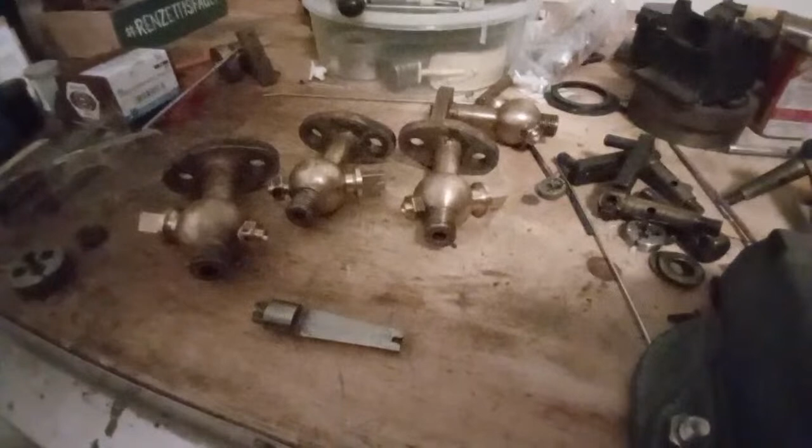We seem to have a bit of a situation here, that's where we're at. I've misplaced my 8-inch tablet, my Samsung Galaxy. I've got no idea where it is, and it's what I usually live stream on. So I'm reduced to my telephone, which is a bit muddy and a little bit ordinary. But we'll get by with it, and I'll have a bit more of a concerted look, and hopefully it turns up before next week.

It's a bit different. No idea where it is. It's one of life's mysteries. It's either in this room or the other room. I haven't taken it anywhere else. I haven't been anywhere else, really. I'm pretty sure it didn't go in the van anyway. I'm pretty sure that it's not in this room, so it must be in the other room, and I've had to turn that place upside down, literally. So I've slotted it in on a shelf somewhere. I've got no idea where. So sorry, guys, to put up with this.

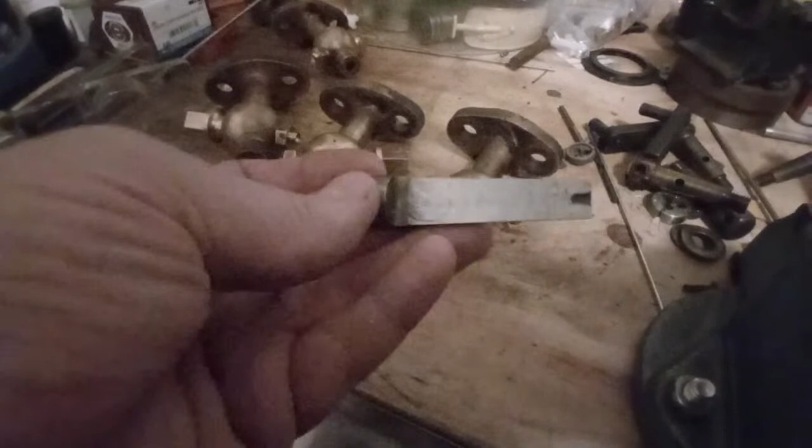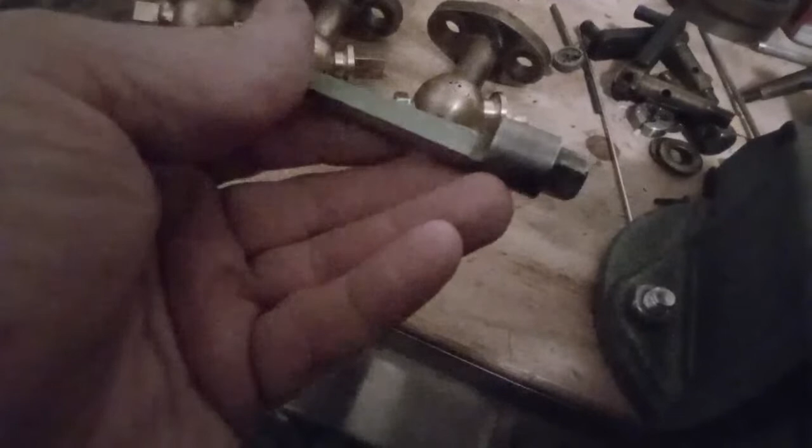I guess you would call it a D bit, but it's not even, because there's no clearance, no nothing on it. And I hoped it would scrape everything a little bit bigger diameter, and it probably will, but it needs some work yet. So it's just got a hexagon on that side for a socket, and it's hardened and tempered back to about 60 RC, something like that. So pretty happy with that.

Now, while Stephen Lang's here, Stephen, the new software for the oven, I don't know if you've run across that at all. If you have, I might need to touch base with you, because I couldn't make it work on my controller for my oven. There's a new software package and it doesn't seem to be as good. I've had a new computer since I used it last, and the old config is no longer available, and there's a new one. Struggling with that anyway. That's beside the point. I'll get it going at some point. I ran out of time to mess with it, and I just did these manually.

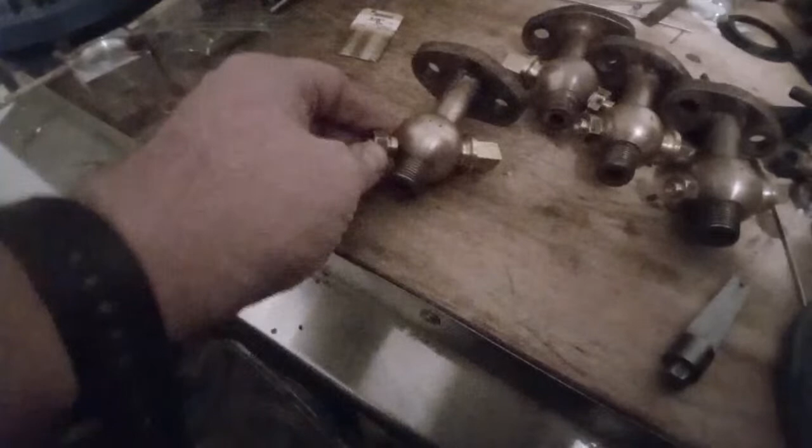Anyway, these three I'm pretty happy with, and they should be good. These three, I think they're going to be fine. This one is right down. See, there's only about 3/32 or something there, and it's still a bit loose in the back here. So there's a lot more sticking out here. Now, I don't know whether I fix it properly or whether I just leave it and hope it doesn't leak, or whether I just put it back together like that and pretend no one's ever going to notice.

Tea and Biscuit says fix it properly. That makes sense. Now, what do we do? There's several things we could do, I guess. We could find the right plunger and set the lathe up again and make a new one, which probably isn't the end of the world, and make it fit this, right? So it fits, sticks out the right amount and everything else, and number it so that if it ever comes apart, no one ever has to put them back together in the wrong order.

I could make them all the same, and I could bore that out and put a sleeve in it with the right taper in it.

It's good to see you back, Stephen. Good to see you, Steve.

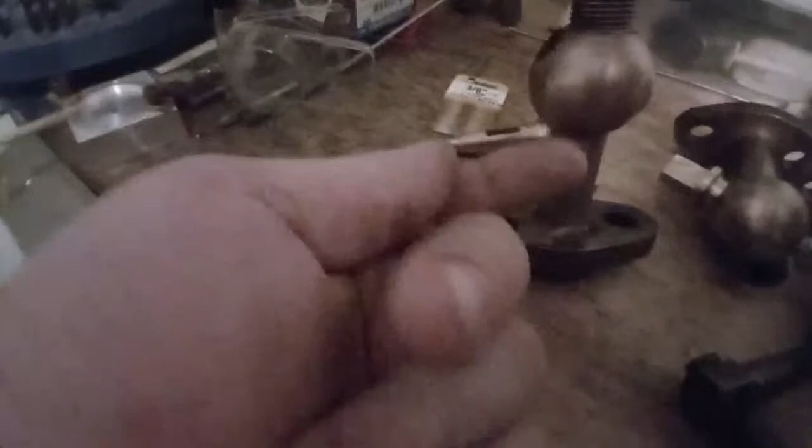And it sort of wipes off. Like if you rub it, you'll end up black. But it's tallow based, or it's cut with tallow. It's oil cut with tallow, and it's pretty thick, awful gunky stuff. And it's designed to get a bit more fluid when it gets hot. But when it's cold, it's like tar, really.

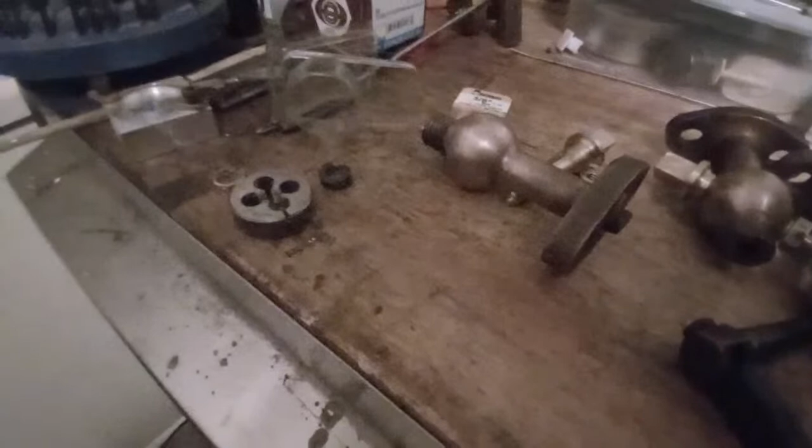So that's the best thing, I would say. Just give it a good spray off with diesel and a wipe with a rag when it's hot, and most of it will come off. But it's not the world's funnest job, but it's got to be done at some point.

So that's where we're at. That's about all that's been happening is this particular job, and I really need to get this finished, so we're working hard on these at the moment. If I could have it all done by the 7th, then we could probably get this going.

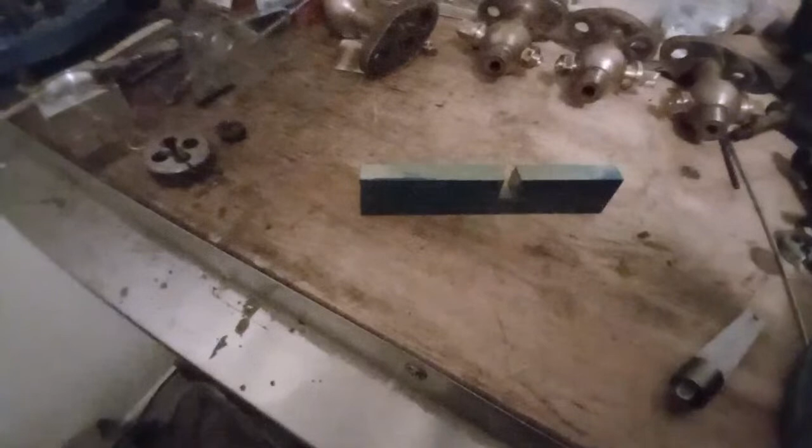In other news, cut the web out for the crank to turn it between centres for the little Paul Breisch Lil' Brother engine.

That was, have a look here, probably have a look at the drawing here. I don't know if you can even see that, to be honest. Probably can't. That's very terrible.

Let's come over here, put this on the lathe, because we have got a light. Whoa, that's bright. Whoa. It's not the answer. But there's the drawing for the crank.

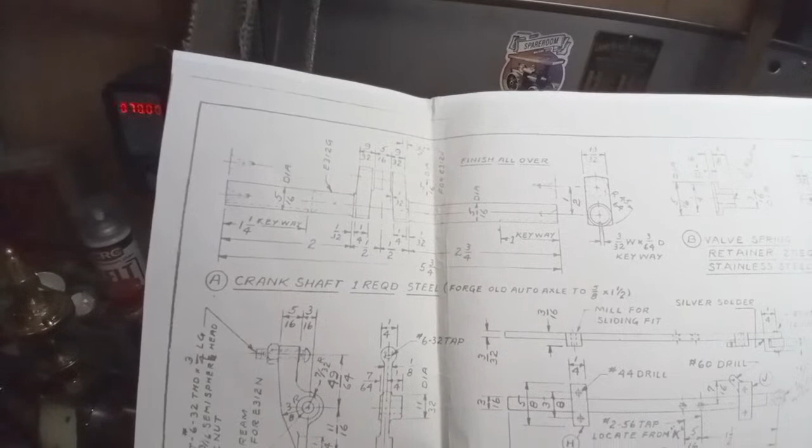Hey Dan, been talking about you.

So basically it's a matter of machining this on these two centres that I've got marked in the end. Pretty much.

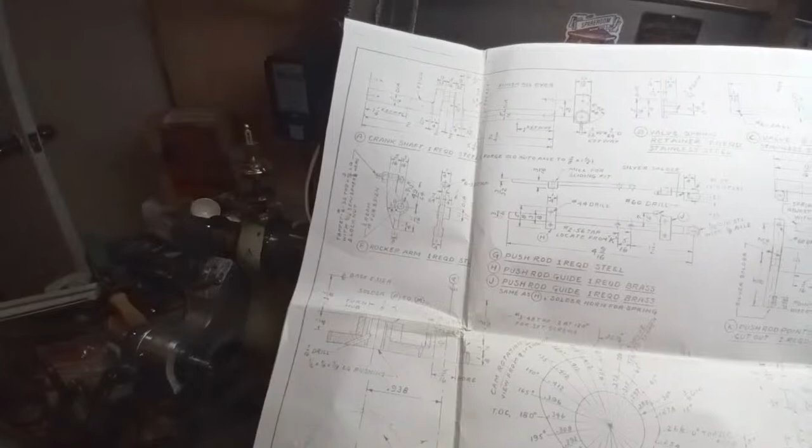So there's another moderator handled that. Anyway, Dan says all the bad stuff. Exactly. What are the plans for?

It's Paul Breisch's Lil' Brother engine. It's sort of one of those jobs. This place is chaos because I was in here until late last night.

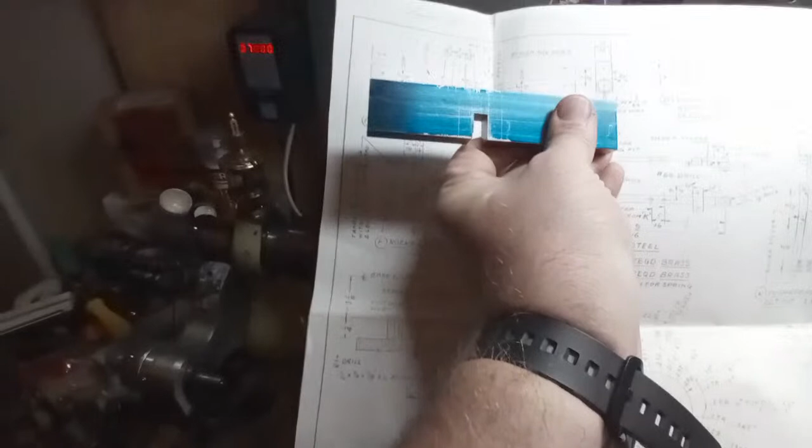So basically we've got the crank. It's got a cutout in it. We'll put it that way up, I guess, or whatever. That's the right way up for it. And it's got two sets of centre holes on each end.

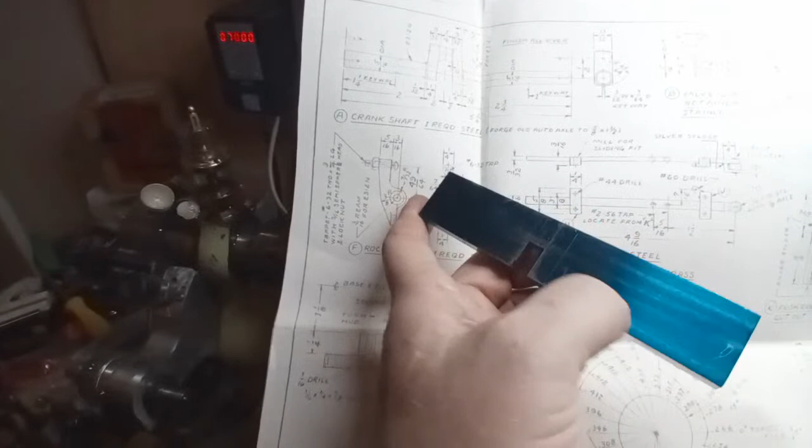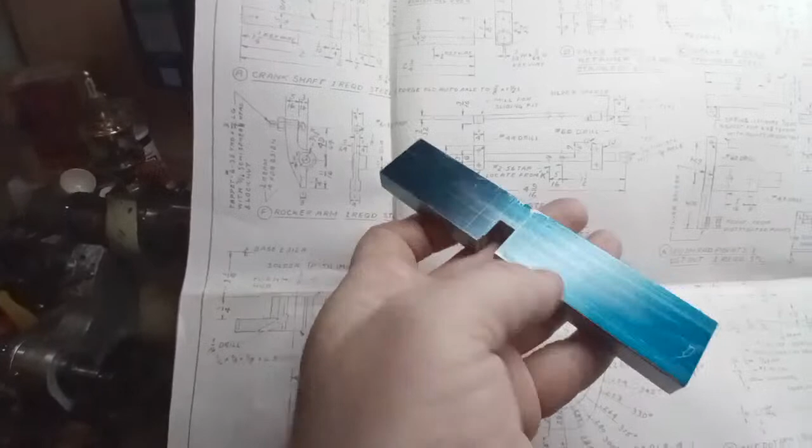So basically the way we make it is we set it up on these centres here, on that end, and machine this crank, and then cut the rest of it out and put a soft solder piece in there to stop it bowing when you put the centres in, and machine the other pieces in free end on between centres. So that way you get a crank with both these running parallel.

So that's a job. This is something that has been very, very slowly happening in my downtime. I don't have a lot of downtime, so I'm trying to spend a couple of hours on it a weekend.

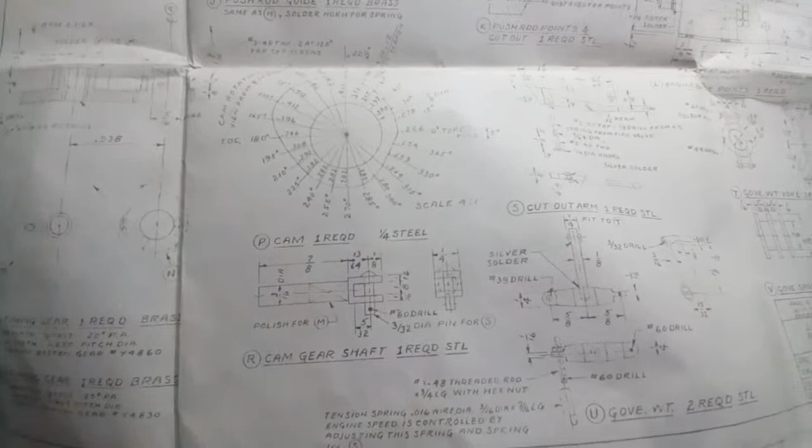But these are the drawings. There's a couple of sheets of fairly comprehensive drawings and a lot of little detail bits. We'll have a look at it.

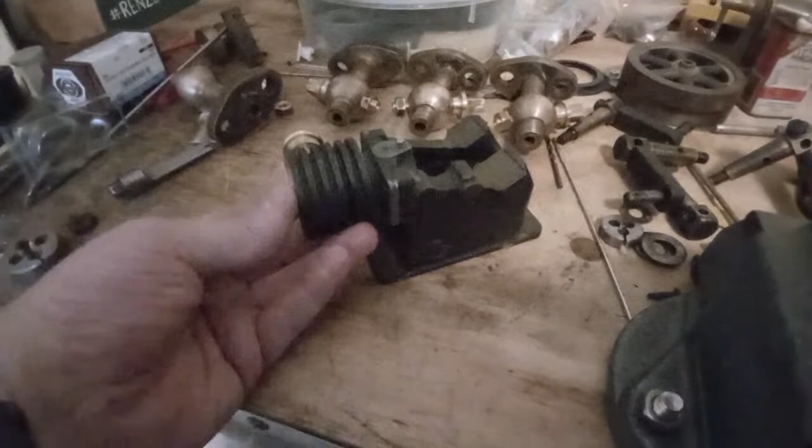It's a little hit and miss stationary engine. Air cooled. With, I guess, a couple of flywheels on it.

We'll put these somewhere so that it looks like it's meant to be. That gives you some sort of an idea of the size and what it looks like.

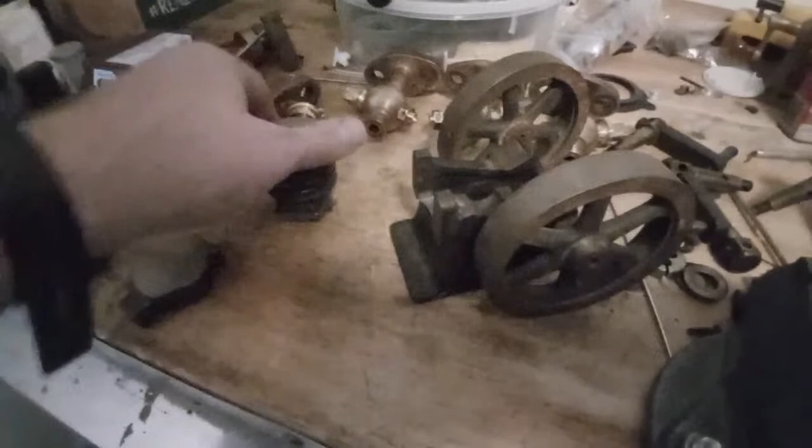Picked these up years ago, well, quite a few years ago, this set of castings, and they were sort of half done. None of the work on them is of a particularly high standard, unfortunately.

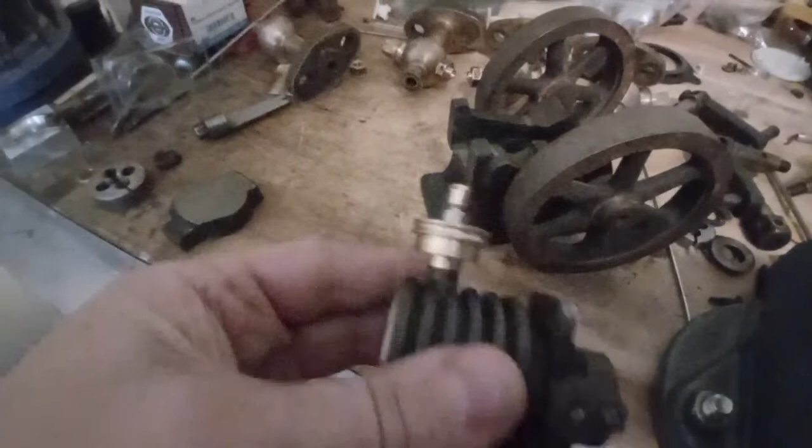And it's a matter of remaking all the bits as you go, and I'm not filming it or anything. But got an oil cap on the end there with a pulley for the air-cooled fan.

I've got a box of bits, none of which are very much good, to be honest. A little box of parts. I've got 2 flywheels, a cylinder, and the cylinder head,

and the base. I had a crank that is of no use to anything that's been fabricated up. It's really not the answer. Don't think that'll work, so we're going to keep that for something else or toss it.

I've got some bits, some piston rings that are probably rusty, some springs and some timing gears. A piece of stuff that says cam.

Some copper washers. I've got bearings that have been made. I've got some valves that are pretty awful, really. They're no good for it, not fit for purpose, really.

And I've got a glow plug that won't work, and some springs and a piston casting, and some main bearing caps. So that's where we're at.

And in the downtime, I'm just spending probably an hour a week, if that, to get this running. Hopefully that changes at some point in the future. But...

This was already bored, and none of the other features were machined, which is a bit of a pain because you've got to set everything up in relation to the bore.

So I had to make a mandrel to put that on, get it running nice and true, and then we face this end and face this end, and face this here and this here, and this boss here, and threaded it.

Then we made that bolt with the oil hole and the fan.

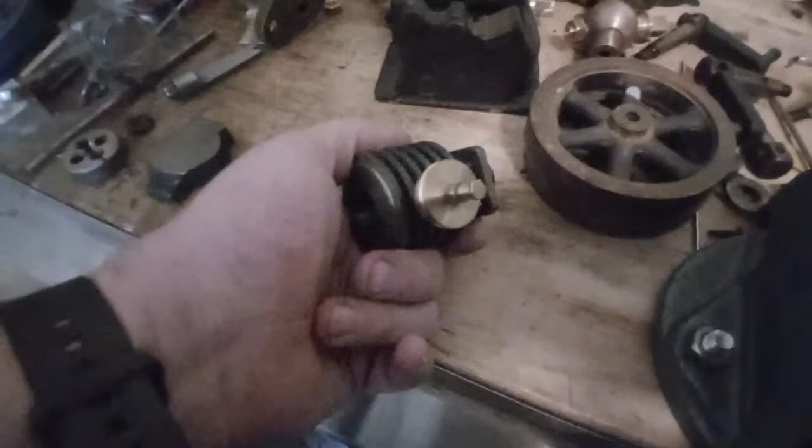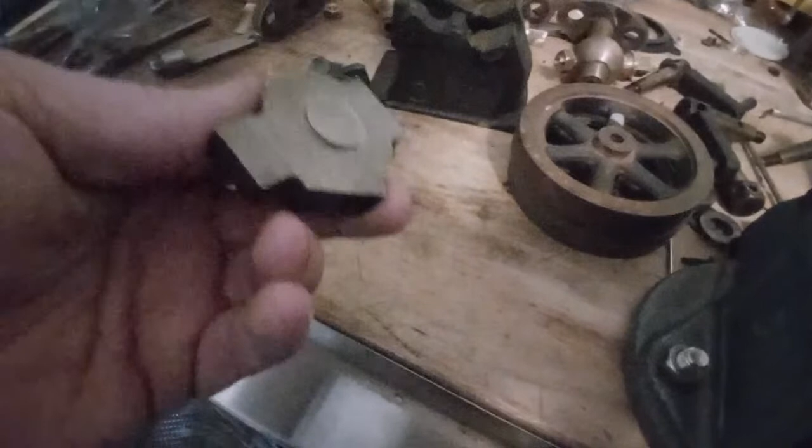But this, unfortunately, for some reason, is 6 thou under, which is a pain, because it means I've got to set this up and machine that again to fit, because I'm not going to be able to lap out 6 thou. That's just not going to happen.

And it's not a bad bore, it's probably half a thou bell on each end. So it will clean up nice, but I'm going to have to set this up again and remachine it, which I really wasn't thinking was going to be a very fun job.

Hopefully these flywheels aren't too much oversized. I'm going to machine the crank to fit these, and then if we've got to make a new main bearing to go in the caps, we will, and it might work.

So that's where we're at. It's not very big. It's 3/4 bore, something like that. It's going to be a fun little engine, but seriously, this is the first weekend for weeks

that I've done much to it, for a couple of weeks anyway, and all I did was start that crankshaft, which took me probably an hour and a half so far into it.

Got the lathe back round straight, but not for long obviously if we're going to fix one of these again.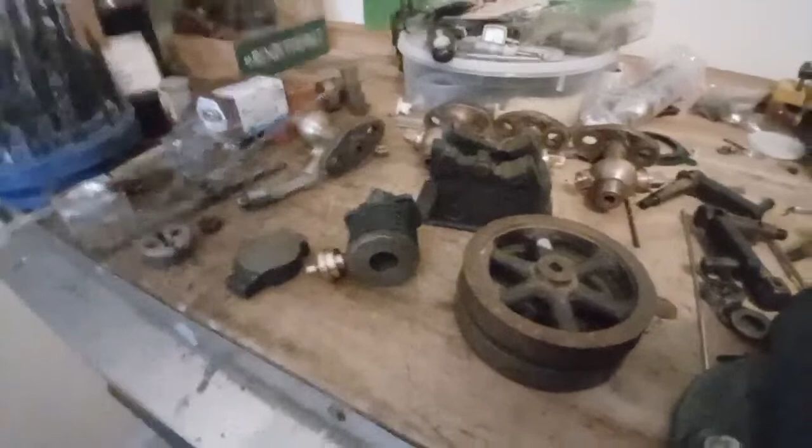After that I'll get in and finish the crankshaft and make it fit the flywheels nicely. Broach a keyway in them, put keys in them, and make them fit the gears and everything else. I'll bore the gears and the mains to fit the crank so it's all good. Hopefully we should have an engine that works one day, maybe. I've not got a good track record with that, but we'll see how we go.

So that's another job that we've been messing around with slowly. It's the downtime project, and there's not very much of it happening. Probably I don't need downtime projects because there's no downtime, but anyway, it'd be nice to get something made.

Spider bite's good. I've still got a couple of scars, but nothing serious. It looks good actually, I'm pretty happy with that. I think it's nearly back to normal.

Apart from that, that's what's been happening. No idea where my tablet is. I actually put all my welding consumables away down there behind this bench, so I can stock up my materials drawer again. A lot of this stuff probably needs tossing or going out or whatever, but we'll get this stocked up. We haven't got all that welding consumable leaning up against the wall there now, so pretty happy with that.

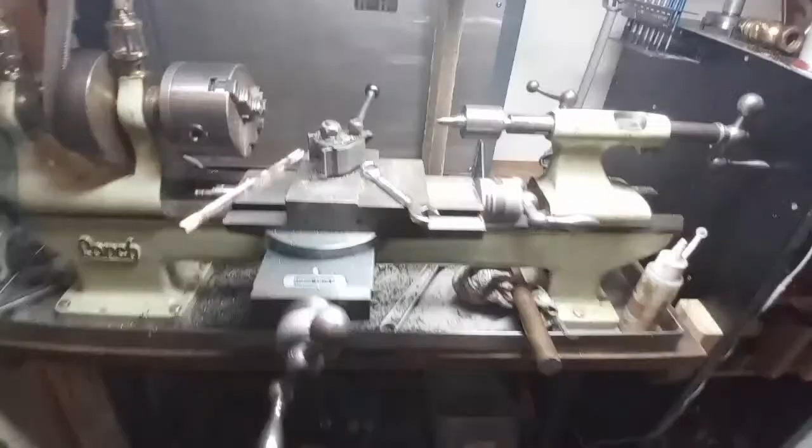The lathe's a bit of a hot mess at the moment, needs a clean. It's been cutting O1 all weekend to make that reamer, which was probably a bit of a fruitless exercise, but anyway. So that's what's happening. I really want to do a bit to this lathe too.

There's so many things that I want to make for this, but at this point I haven't got any downtime at all. Like very, very little.

So no projects are going to be started until we've got at least these finished, and some done on this, and some other jobs done, like the rest of those signs, and yeah, probably I'll get another project out and commence that as well. Oh well, not commence it, no, but it sounds a bit weird.

Probably make some progress on something else as well after Glenray Timberfest, which is the last week in July, which I have off. So I've got a week's holiday last week in July, which is well overdue. Got a fair bit owing to me, but I'm going to take that week and we can get this stupid roller presentable for going on show.

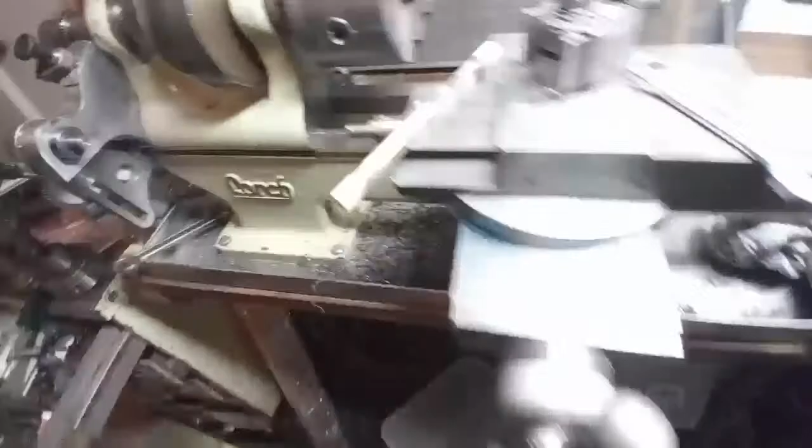I'm really a bit ashamed to show you this lathe because it's kind of covered in dirt. There's a boride stone that needs a trip in the ultrasonic.

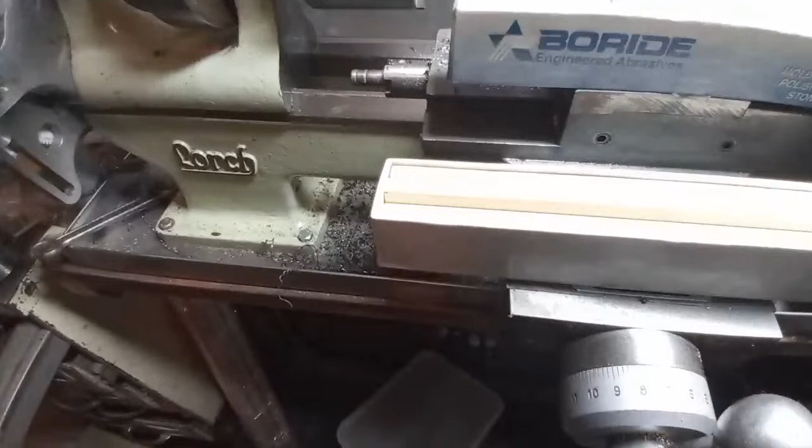Don't know if you've seen these. I guess everyone's seen these. They're fairly expensive, but if you can find them in sales, these are better—I feel that they're better than needle files for a lot of jobs. There's a box of 1/4 inch by 1/4 inch by 600 boride.

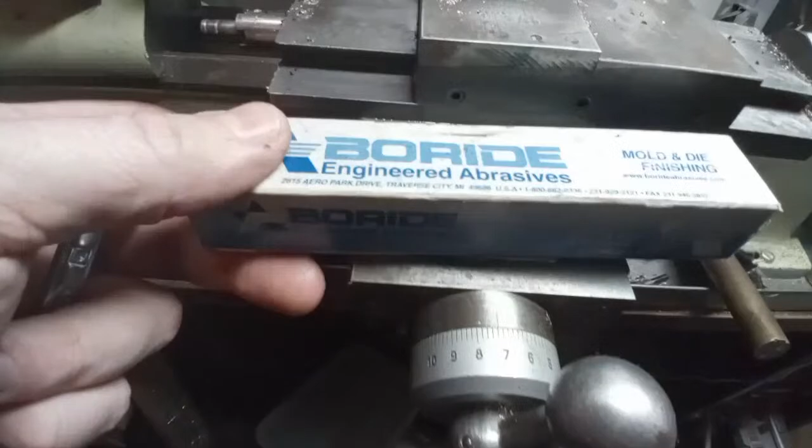There's a very dirty one that needs to go in the ultrasonic. These are mould and die finishing stones. They're not all that fine, some of them are quite coarse, but pretty good little stones. I've got a box full of them. Pretty good thing if you're finishing off hard materials or doing fine polishing work on metal.

There's a website, but don't go and buy them. Just keep an eye out, and if they come up, you know what they are and you know to get them because they're pretty useful.

Now, I've been thinking that this could do with a DRO on it. Poor thing's looking a bit lived in, to be honest. Needs a clean.

An ultrasonic cleaner is absolutely worth getting. If you're going to run anything in it that's going to do any work, though, you really need it outside.

Mine's set up. I think it's got Joe's precision ground flat stones in it at the moment. I think they've been finished, but I don't think he's removed them, so they'll be pretty well waterlogged.

I've given mine a clean the other day as well, so we were set up to do that. It's a pretty useful thing if you've got one big enough to do your jobs, and it gets everything nice and clean with minimum effort.

I was thinking I was going to put a DRO on this, right? It's a bit difficult compared to many lathes because we've got this slide here, and we've got this slide here.

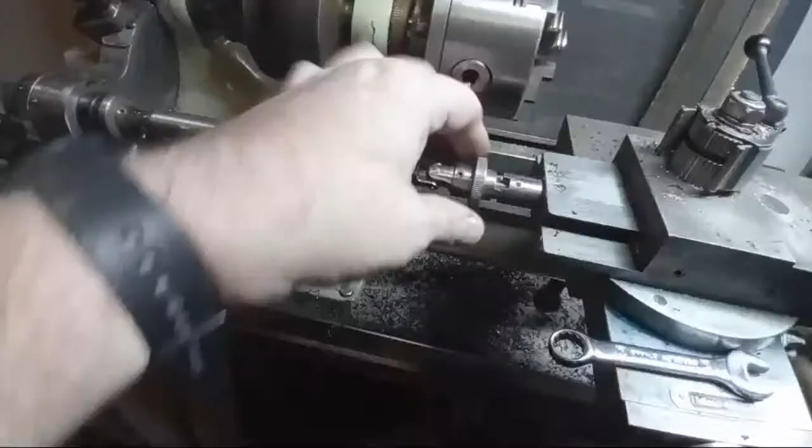So this drive here, we're still working on the drive here. I think I've got it pretty well sorted actually, it's just a matter of making the bits. I know what I'm going to do. And this one here, which locks in on a dog clutch here, gives us drive through from the gearbox, you see. That's the theory.

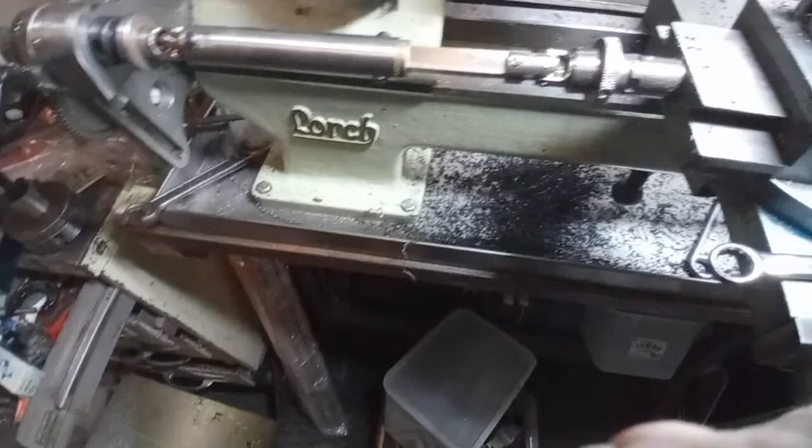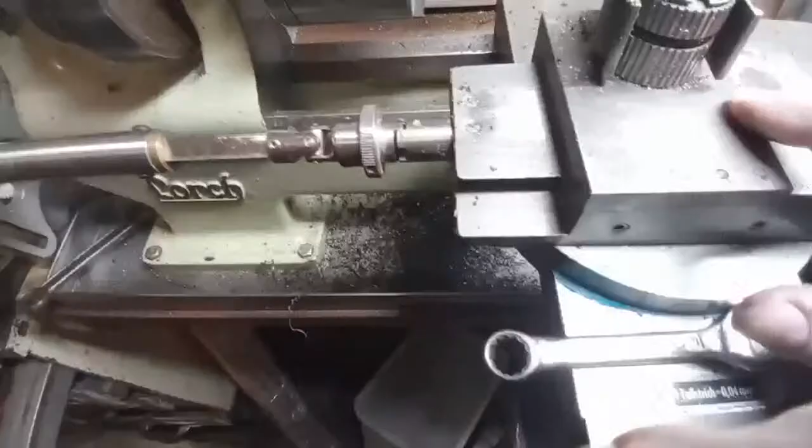But I'm going to cut a groove in the top here, I think, in the back, and put a slidey piece on here with a stop on it, in under here, pretty close, I think, to this, because this plate here is new. It's just a shallow groove. I'll set this up on the mill and put a shallow groove all the way through, and then put a piece through here with a locking tab on it to hold it in place, something like that.

And then I can set this up so that when it gets to the end of its cut, this pushes this out of the dog clutch into the second position there on the ball detent. It's working on the shaft there, and keeps spinning, but stops this. So that's something else that's got to go on here.

I don't know how we switch to the lathe, but there we go. This is one of the things I've been thinking of, because I've been working on the lathe.

So it's a matter of just making a recess in this, I think, probably seriously 3mm deep, and then probably 6mm wide, and get a piece of 3 by 4 by 6 or something to come out here with a bend in it.

And then probably some sort of a little cover on here with a screw to hold it in place, lock it down. I don't know.

I can't see ever having to use this side of the Multifix tool post. I've never ever had to do that. Usually it's this side or this side. So it needs to really, I guess it needs to clear this. But that's probably not a difficult thing either, if it only sticks up 1mm or something.

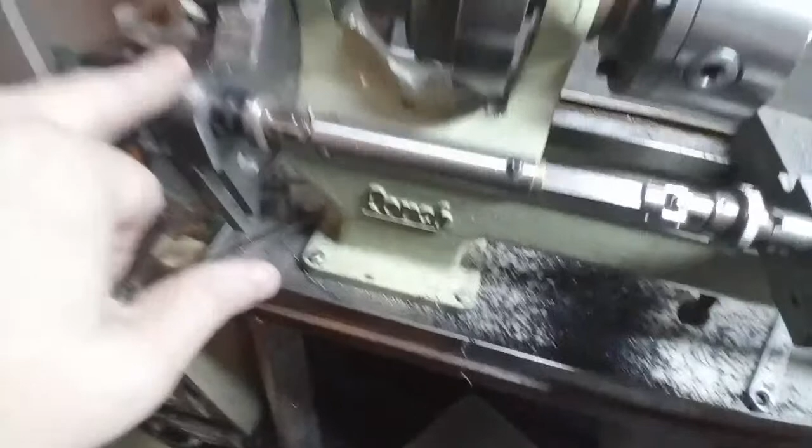Don't know. But the first real job on this lathe, now that it's set up again - things I need to do, one of them is to get all this up and running. Going to sort this out with a spring detent, the same as this, just a screw-in one in this piece here.

There's a grip collar, I guess. Actually, I've lost a circlip off there. That's a bit of a problem. I reckon I've got one, but I have to put one in.

These have still got C-clips on. I don't know where that one's gone. Interesting. Anyway.

So I'm going to put a detent collar on there, and then I'm going to cut a notch in this side here. And we'll put a little roll pin or a dowel pin or something in the shaft, so that it actually locates on it without too much backlash and clicks into the detent, so I can take this off when I need to.

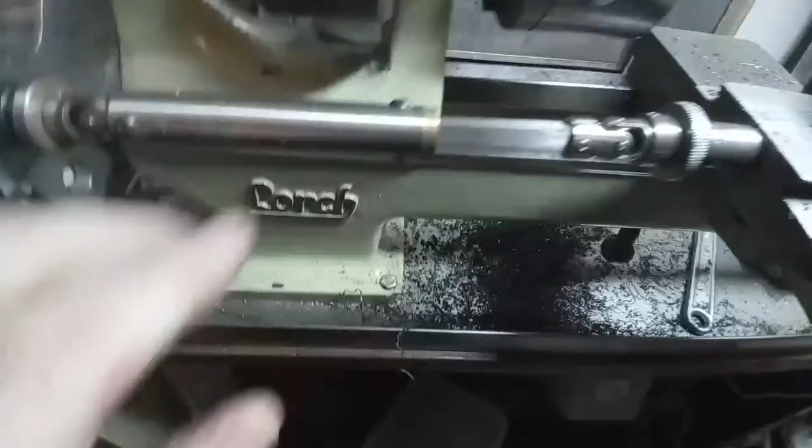Another job that needs to be done on this is it needs a screw in this inside here, inside this bush, so that when you take this apart, it doesn't come apart - because that's kind of one of those things it's doing at the moment.

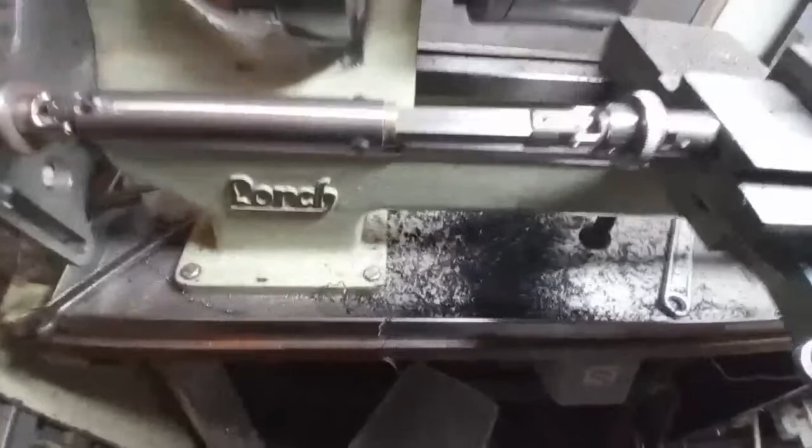So that's something that needs to be done, and then it needs a cover on it, and it needs finishing off basically, and it needs a box to put all these bits in when it comes off the lathe, which may or may not ever happen, but it'd be very nice to have it, and it would have been very nice to have it this last weekend, but anyway.

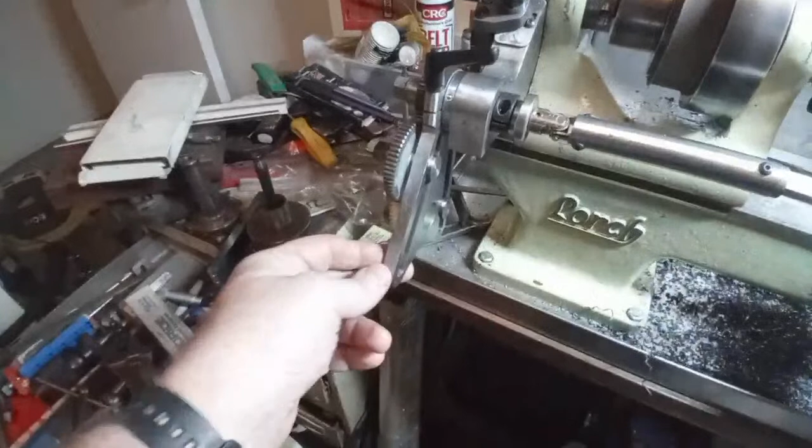So, if someone's new here and hasn't seen this, this is the thread cutting attachment for the lathe. So far it's all handmade. I've made all this. It's got tumblers here for forward and backwards.

And it's got a quadrant here for change wheels. All this is sort of worked out so it's one hand operation. This just tightens up on here like so with the spanner. It just fits the standard lathe spanner, and there's room here and spaces for another set of gears if we need to put compound gears on it.

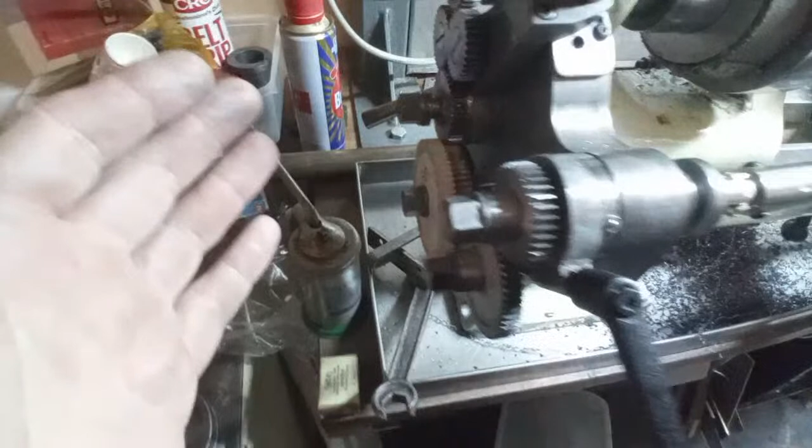I think there's a spacer missing off this one here, maybe. Don't know where that went. So this is all something that needs work, and I think I'm just going to make a cover that goes on with a pin and some sort of a lock clip, or even a threaded bolt, so that I can just sit it on and thread it up. Not sure. Rather than have it hinged, which seems a little bit too complicated. The problem with a cover that just comes off tends to be that you put it upside down somewhere, put bits in it, and then it doesn't go back on. So I'm not sure about that.

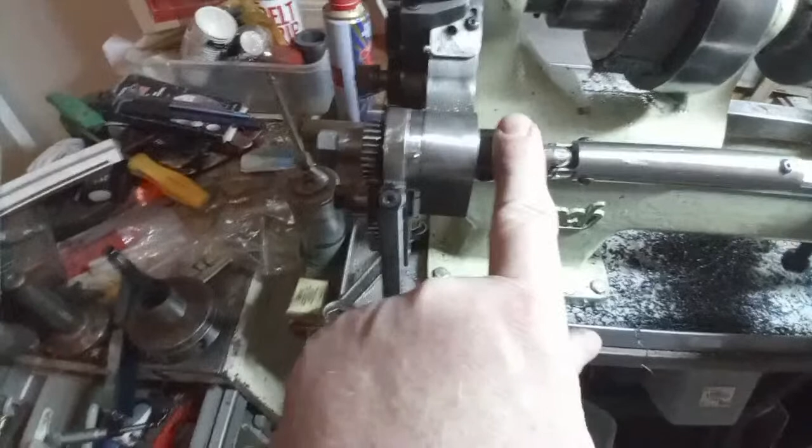So next job on this is to get this back together and fitting nicely, so that we've got quick release on this end - it just unclips - and quick release on this end too. So this one's got 2 grooves in here. I think you can see that.

And this ball detent here, it clicks in that one there, right? It just spins without coming off, and it clicks in that one there. I think this is probably a bit dirty in there in places, but it also clicks in that one, so it doesn't come off there.

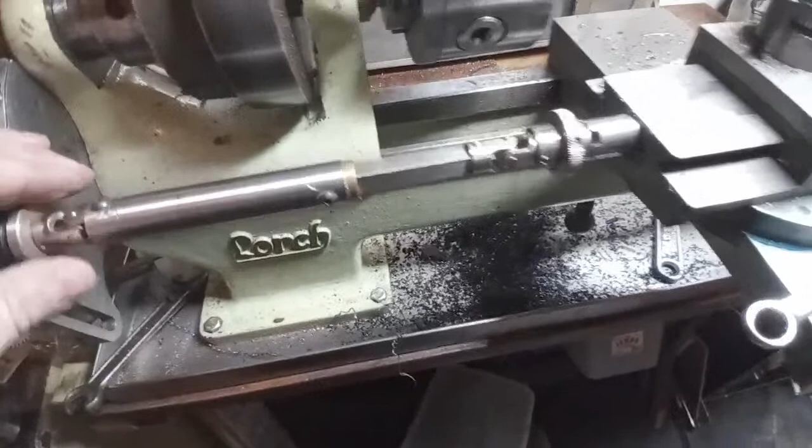And I'm going to do the same on this one, so it just clicks in one spot, and then hopefully we've got power feed and thread cutting. I know it works because I had this fastened directly on here, and I've done quite a bit of thread cutting with it, but it needs some actual refinements and so forth.

And this poor thing needs a clean, and probably a coat of paint wouldn't hurt it at some point, but that's not going to happen either just yet. Anyway, I've bored you all to death with my lathe. No ideas about the DRO on it, and probably it hardly needs it, because all these are accurate and they're all pretty easily worked out, so probably you don't need it.

It'd be very handy for mapping profiles and things like that, maybe with a DRO on it. I don't know.

Anyway, what's everyone else up to? What other exciting things are happening? Everyone's gone quiet. I've moved over to the lathe and started talking about it, so everyone sort of thought, well, that's the end of that for tonight. No more fun happening there. Team Biscuit's still working on a little stationary engine. Can't wait to see that running. Must be getting a little bit closer now. I saw you finish the burner.

These. Just put the countersink away in the set. What's everyone else up to? Anyway, this is a work in progress and it needs a good clean at the moment because, yeah, it's done some actual hard work in the last little while. That place needs a vacuum and a clean up.

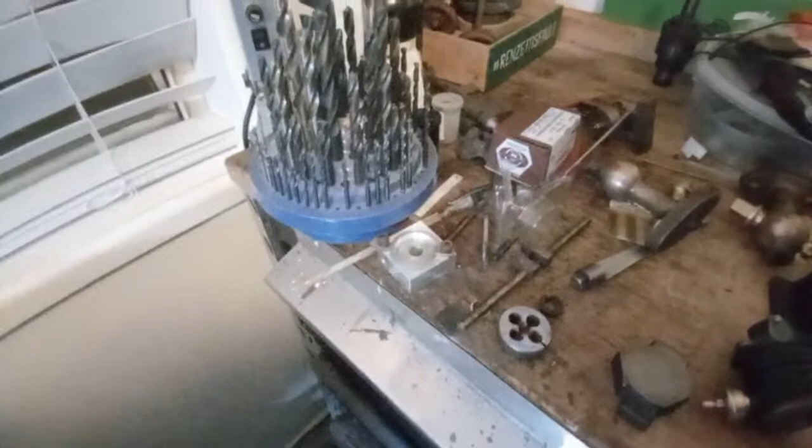And everyone else is either not busy or asleep. That's a pretty good way to be honest. I'm taking an hour out to have a talk because it's about the only social hour I get during the week. I've had a talk to Dan this week. I think I had a walk talk to him. But things are happening. We're probably going to. I'll try and get some footage of stuff that we've been doing. Oh, nice. We'll go and check that out. Thanks for that. Winky's pretty watchable.

Need to work higher rather than lower is my thoughts. But anyway, these are 900, which is standard workshop bench height, I think.

Oh, that's exciting, Stephen Lang. That's exciting. We had to talk about that last week. Kenneth Wills. I was very much looking at it the other night and thinking, gosh, I'd really like to make a roller with that. But I can't think of a way to do that. So probably at this point it's not going to happen. Mostly because I've never ever come up with a nice serviceable design, and secondly because I haven't got time.

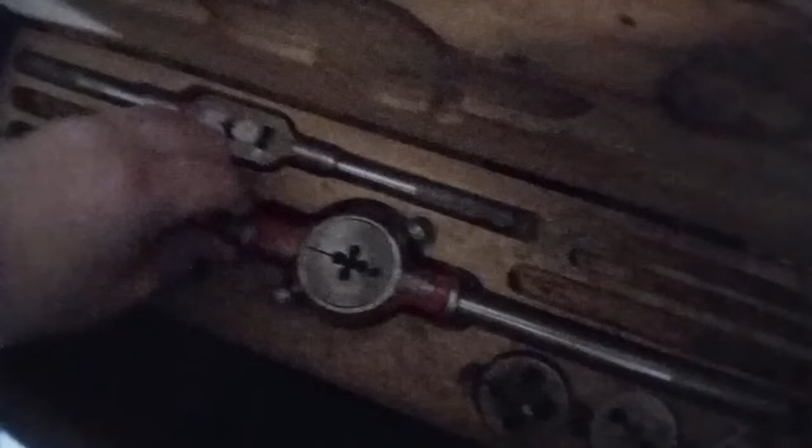I have a feeling that if I keep looking in here somewhere, I'll probably find that tablet. Hasn't turned up yet. No. I've got this set, which is a P&N, which was Dad's. It could do with a clean, actually. I'd like to get it all back together nicely so that if I've got to do a job away on the roller or something, I can just put it in the car and take it. Don't have to worry too much about anything else, because everything for the roller's in here, basically.

But these are 2-inch, and that one doesn't cut at all now. Basically, it's worn out. And I haven't tried any of the others, but I'd really like to get some upgrades on these, so if I find them, I probably still will. But tablet's not in that cupboard. It's also not in that one. It's a wire brush, brass wire, a steel wire brush. I might leave that out and use that at some point.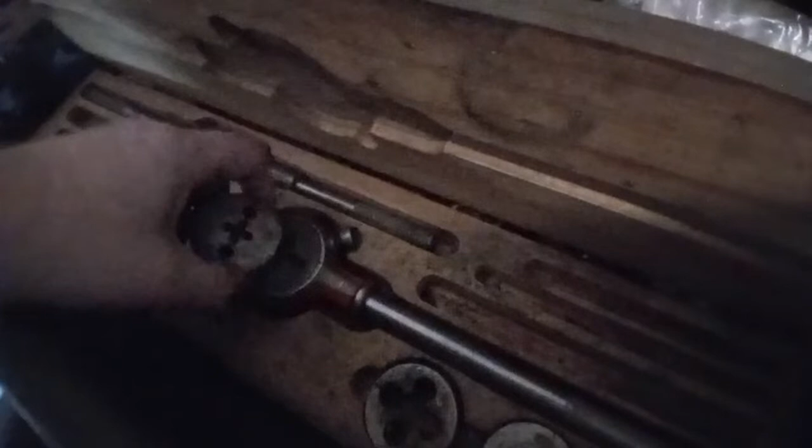It's in the black Vipon sign enamel. So it's not there, so I don't know where it is. My 2-inch P&N dies go down to at least quarter. Let's have a look. What's that one there? Quarter 20. That one's 5/16. Yeah, well, quarter, 5/16, 3/8, ½ inch, 5/8 and 3/4, I think, in that set. No dies, no taps in here at this point. I'd like to get that all finished up and back together nicely. That set.

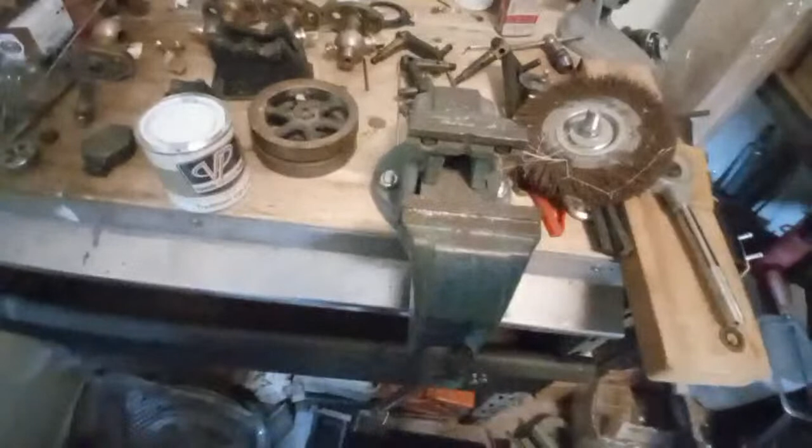I'm glad you're on the mend, Steve. Hi, Anne.

It's a big set. It's a good set, actually. That's the sort of size you want. If you're going to be putting 3/8 and ½ inch threads on things, you really need a die stock that big. This one's hardly big enough, and the sizes I could get in 3/8 were this one, which is 1.5 inch, and inch, which is smaller again. And trying to cut a 5/8 thread, even in brass, with an inch die, is asking for a broken die, to be honest. I don't know whether people just don't do things like that now, or what the story is.

Anyway, this drawer could nearly be emptied, and we need to have a bit of a shuffle about in there.

Thanks, Darren. I might take you up on that. Postage is getting a bit expensive though. Bit of an issue.

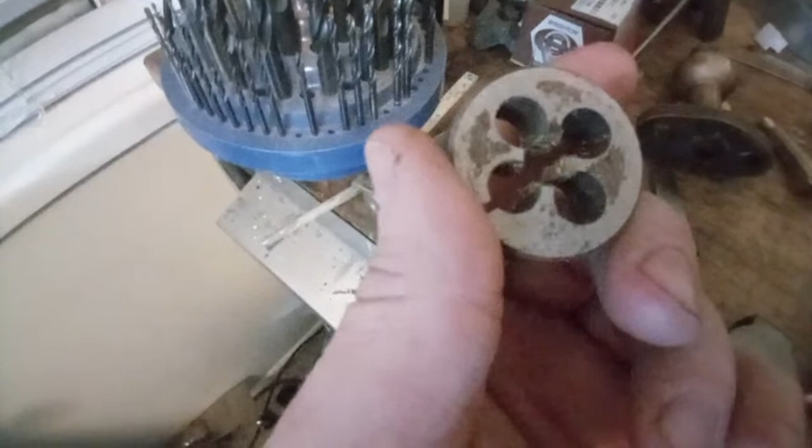I've got 1-inch broken dies. They're 1-inch. I actually bought this one because I broke the... This is a 10mm one. I bought this because I broke the inch one. I snapped it in half, trying to cut steel with it. So, not really the answer. Anyway, mostly all I've done tonight is pull stuff out and put it on the bench. I don't know if that's practical or useful or anything, but there you go.

Other than that, yeah. Basically, just keeping my head above water. Work again tomorrow. Work the next day. Work the day after. And then I've got Sunday off and I've got Tuesday off. One of those days, probably the Tuesday, is going to be Foundry Day. We'll see how we go. I think it's the last one we've got before the 7th. So, if all goes to plan, that's what's going to happen.